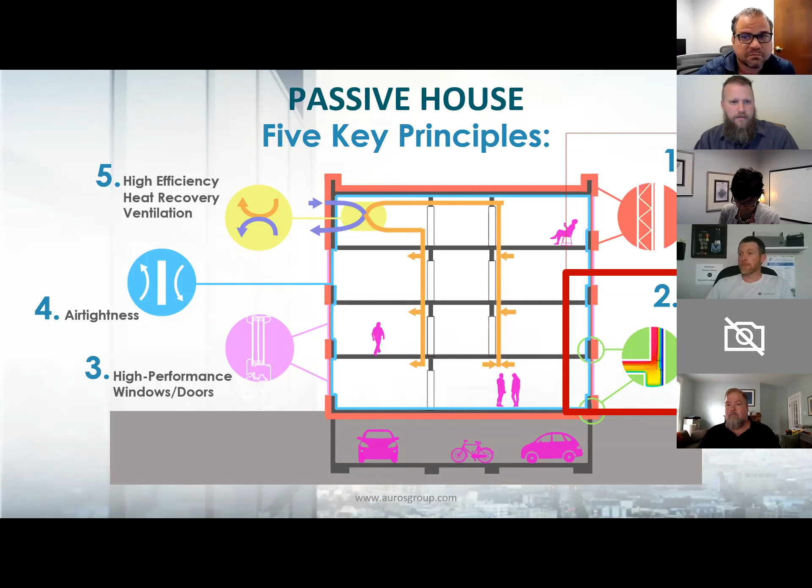Last week we talked about insulation. Now we're talking about thermal bridge-free connections and thermal bridge-free design. We will move on to the other topics in the future every 2 weeks - windows in 2 weeks, air tightness in 4 weeks, and high efficiency heat recovery ventilation in 6 weeks. Those are all the dates - if you receive the invite, you get all the same dates. If you need more info, you can reach out to us, and our email will be up again at the end. We'll email this deck out to everybody who registered, and then you'll see it on our social media, so you can track it that way or just shoot us an email.

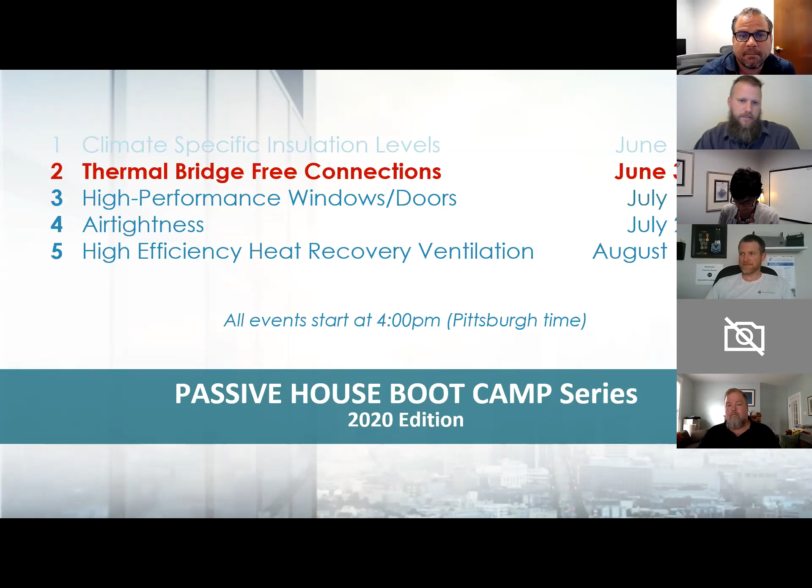There you go. Yeah, thermal bridges. So we have Matt Bowers with us today.

Matt Bowers is an expert in the passive house world, in the PHI discipline. If you saw our 101 earlier, you'll notice there's PHIUS and there's PHI. Matt is mainly a practitioner in PHI. He's from Rochester, New York, lives in a passive house, and has been practicing passive house for many years. He is a passive house certifier, which requires additional education including time in Germany with the standard writers, and he now certifies projects. Matt has expertise in thermal bridge analysis and designing thermal bridge-free buildings.

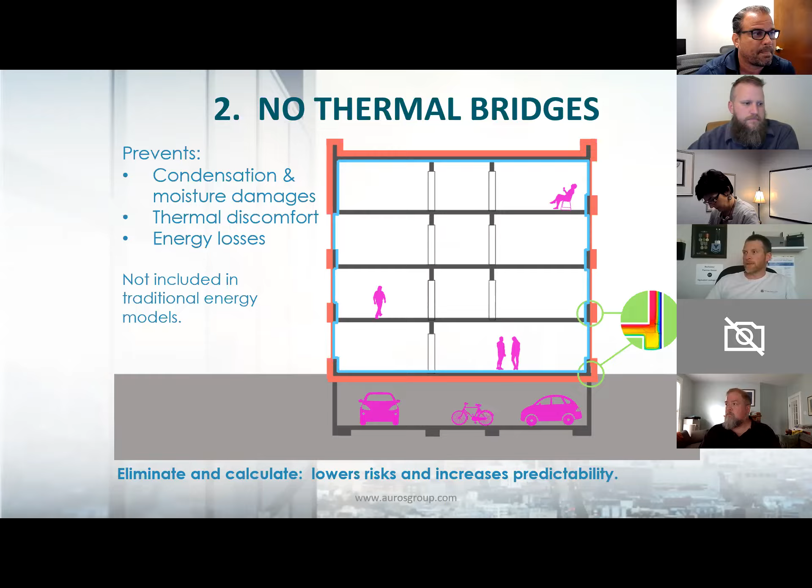Let's do this here. All right, so there is my beginning slide here.

Again, my name is Matt Bowers. I'm the president of Rochester Passive House Consulting, and I'm also a member of CertiPHIers Cooperative, a group of 5 or 6 certifiers in the US, all throughout the country, and we work together and collaborate on certification projects. The reason I got into certification was a bad experience getting my own house certified, and the unresponsiveness of dealing with overseas certifiers. That was my motivating factor to becoming a certifier. I'm also a certified passive house designer and a tradesman. I worked for an insulation company for 10 years before becoming a certifier and starting my own business. So I've had my boots on the ground for quite some time now.

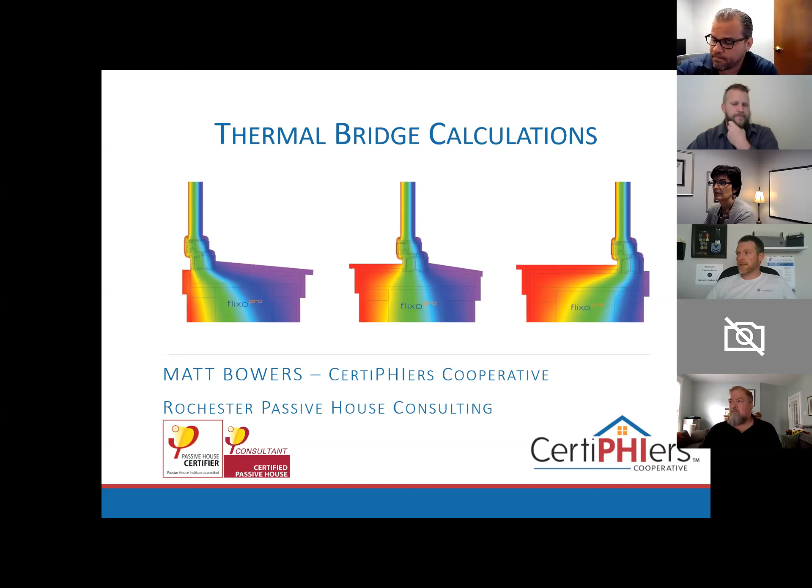So for those of you who are certified designers or consultants, you may have heard this from your trainer: just make your building thermal bridge free. It's so much easier. That's not really helpful. That's one of the 5 main elements of passive house, and they'll just say skip it if you can. Then later in the slide they'll talk about how, to be thermal bridge free, your psi value has to be less than 0.006 BTUs per hour foot Fahrenheit. That's not an intuitive number or set of units for just about anybody. So usually you leave your designer or consultant class with more questions about thermal bridges than answers.

So today I just wanted to talk in really generic terms about what a thermal bridge is, where we can find them, and how we enter them into our energy model. So first, what is a thermal bridge? Well, it's really just a discontinuity of your thermal envelope. I know that's kind of a cheesy answer, but a thermal bridge is just anywhere in your model that is either not counted or counted twice. We account for that in different ways, taking a look at the thermal effects it has on your heating and/or cooling demand.

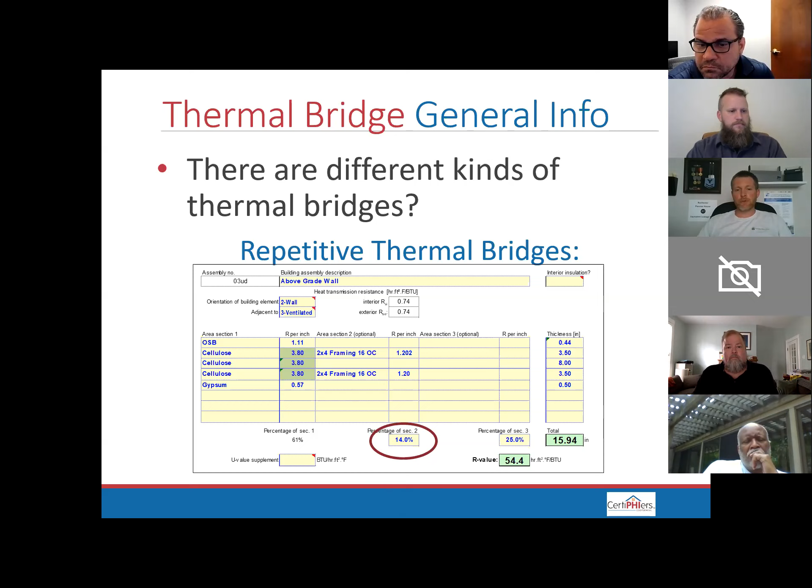So there are 3 different kinds of thermal bridges. There's your repetitive thermal bridges, which are probably your most common, and the biggest example is going to be a stud in a wall. This is a screenshot of your passive house planning package, which is a really phenomenal tool - it's your energy model, also called PHPP. This is just a screenshot of one of the assemblies in your R-values tab, or your U-values tab if you're using the SI package. We enter our repetitive thermal bridges right there, as a percentage of the studs in your wall. Those are the most common repetitive thermal bridges.

There are point thermal bridges, which are probably the thermal bridges that give people the most anxiety. There are some side calculators within PHPP, or your passive house planning package, to calculate those. The most common point thermal bridges you're going to see in a house or building are going to be cladding clips.

Once in a while you'll run into a larger issue, where you've maybe got a steel I-beam that's going to penetrate your thermal barrier, and that might require a 3D thermal bridge calculation. These are really intensive - a single thermal bridge model could run between $3,000 and $5,000, and take someone who knows what they're doing almost a week to complete. What I'd recommend is that you spend that $3,000 to $5,000 improving the design instead, so the I-beam isn't necessarily penetrating, if you can avoid it.

So moving on to what I'd really like to talk about today: your assembly junction thermal bridges, or linear thermal bridges. Those get entered in the areas tab of your passive house planning package, way down at the bottom where there are entries for thermal bridge inputs. You'll enter your calculation from either Therm, a two-dimensional thermal bridge calculation tool, or Flixo, a much higher-end, more intuitive tool. You'll enter your psi value, which is BTU per hour foot Fahrenheit, right there.

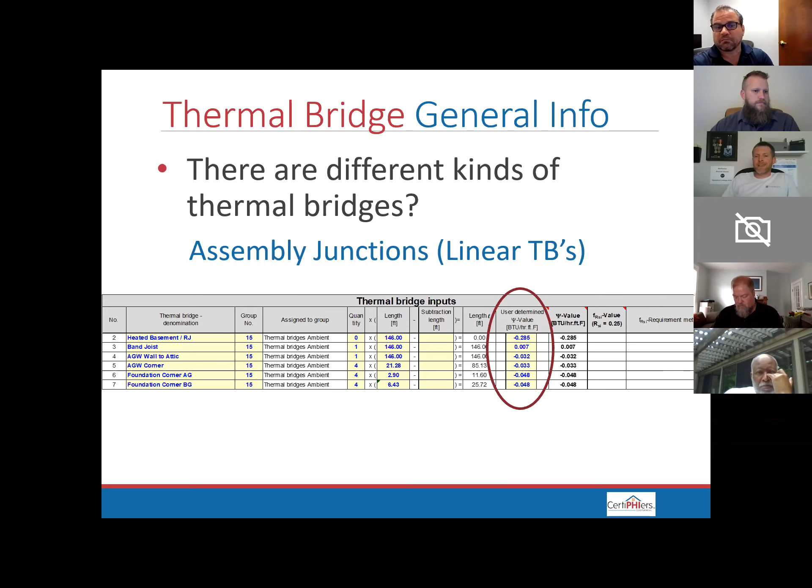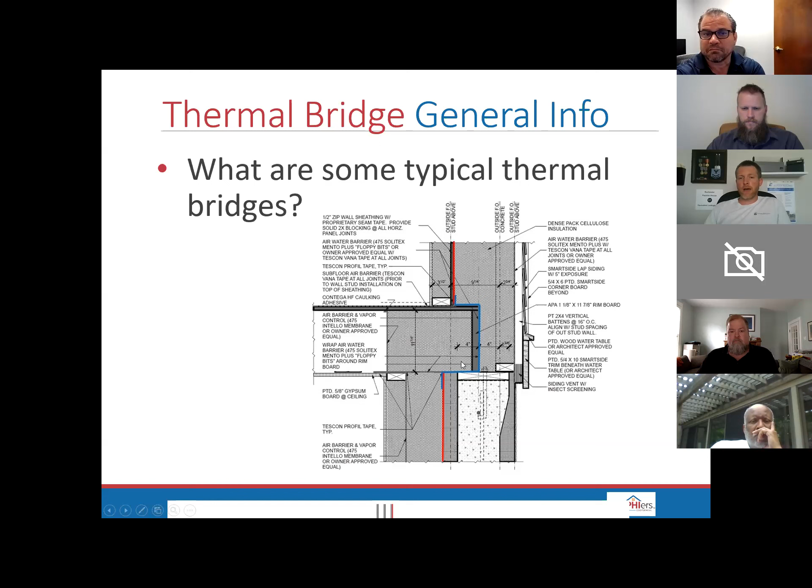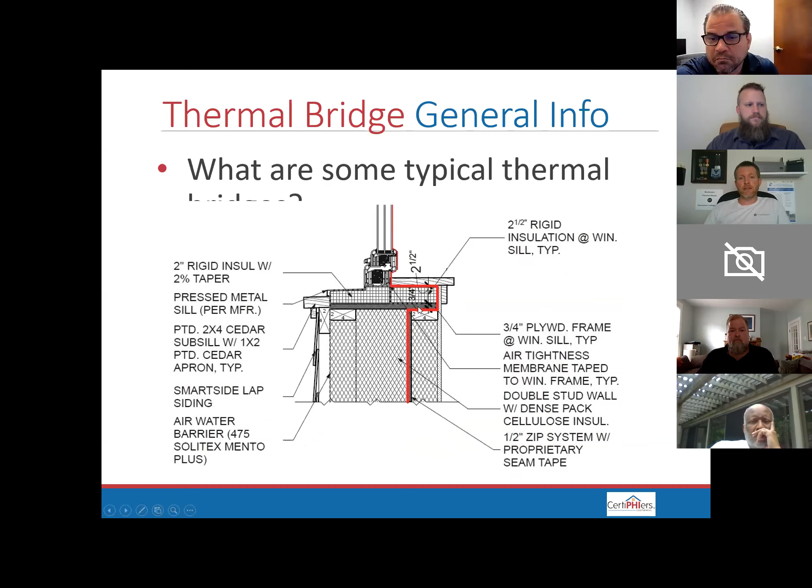If you've got a wall section, you can see here a band joist where there's extra framing between the first and second floor, and your rim joist detail where concrete and insulation somehow connect to a flooring system and then an above-grade wall. This is certainly a thermal bridge worth taking a closer look at. And then maybe my pet peeve, or soapbox, is window installation. I'm a big one for window installation details because they can have maybe the biggest impact of any linear thermal bridge in your building. I'll talk about that as we move on here.

So just general information - what is a thermal bridge and what does the calculation look like? We're going to take this detail, your two-dimensional thermal bridge model, and subtract from it what we've already included in the model, which is an above-grade wall and another above-grade wall. How they come together gives you your psi value. We subtract the true heat loss of the corner from what we've already accounted for in the energy model, which is why you're always going to measure your building with outside dimensions - it's consistent and yields better, more conservative results without having to analyze any thermal bridges.

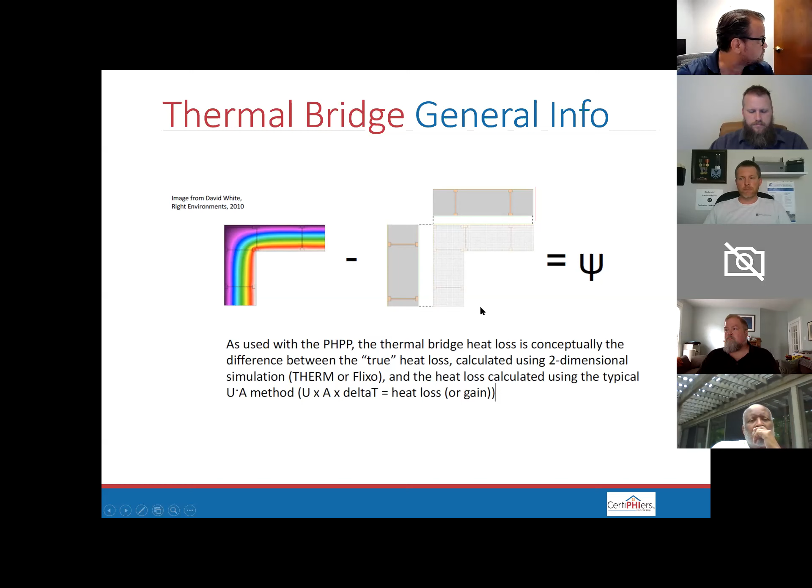This is a screenshot of a Flixo model of a thermal bridge calculation - this is kind of what the output looks like. We've got our formula here at the bottom with lots of Greek letters and letters with sub-numbers. What do all of these mean? Our psi value is going to equal our heat loss number - the actual heat loss of the model, which is 13.0 - divided by our temperature difference. Because we're in SI units, it's 20 degrees Celsius minus negative 10 degrees Celsius, giving a 30 degree Celsius/Kelvin delta T. That's one part of the formula.

Now we need to subtract what we've already accounted for in our energy model. Our U value between F and A is going to be 0.102. These numbers might not be intuitive, but the process is the same whether we're working in SI or IP units. We take the U value and multiply it by the length in the energy model, and we do the same thing for the other wall. Between C and H, our U value - which should be pretty close to what you have in your energy model, whether that's PHPP or WUFI passive - times the length.

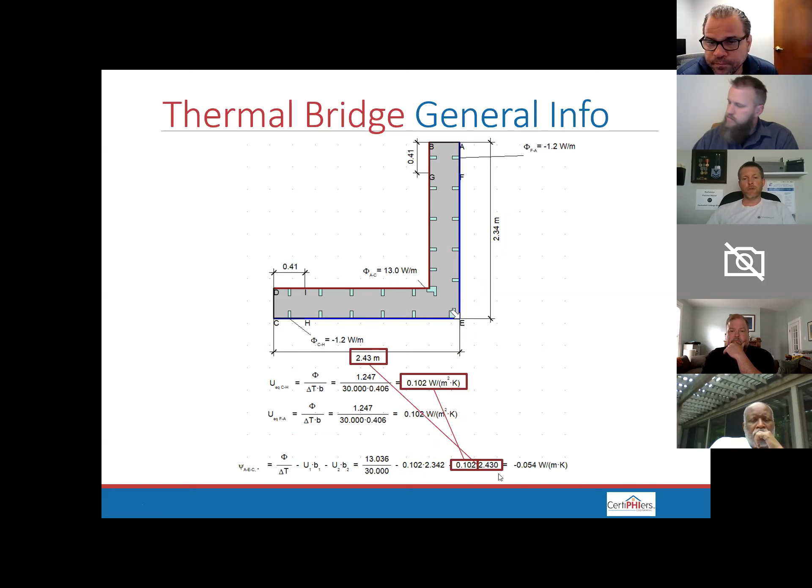And then that all comes together to be negative 0.054. If we do a quick unit conversion, that gives us negative 0.031 BTU per hour foot Fahrenheit. So this detail is considered thermal bridge free.

What we're going to do is take this number and input it into our PHPP. So we've got above grade wall corner, we've got 4 corners that are 21.28 feet tall, and the psi value we just calculated is negative 0.031. That's how you enter a thermal bridge once you've done the calculation.

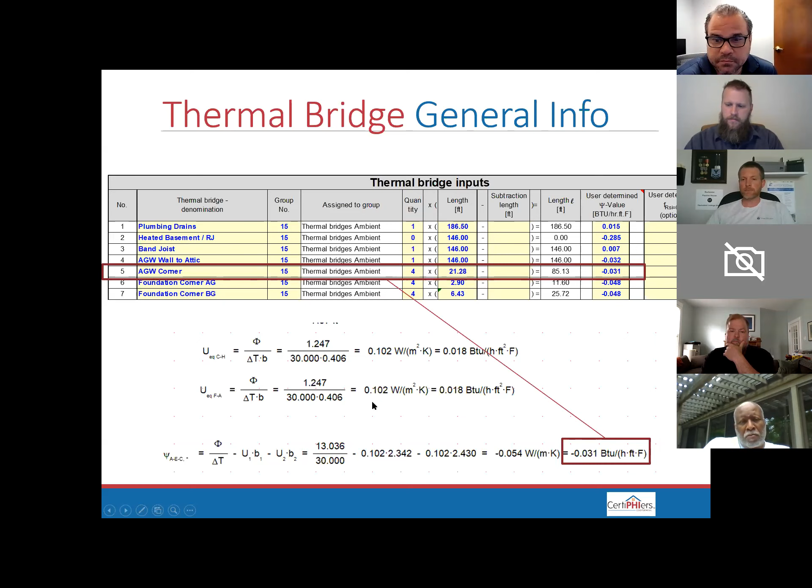Now I do have a set of thermal bridge calculations all ready to go that I wanted to go over with you. This is Flixo, and it's much more intuitive than Therm. What's really nice about it is it does the reporting for you, so you don't need a separate calculator to do it.

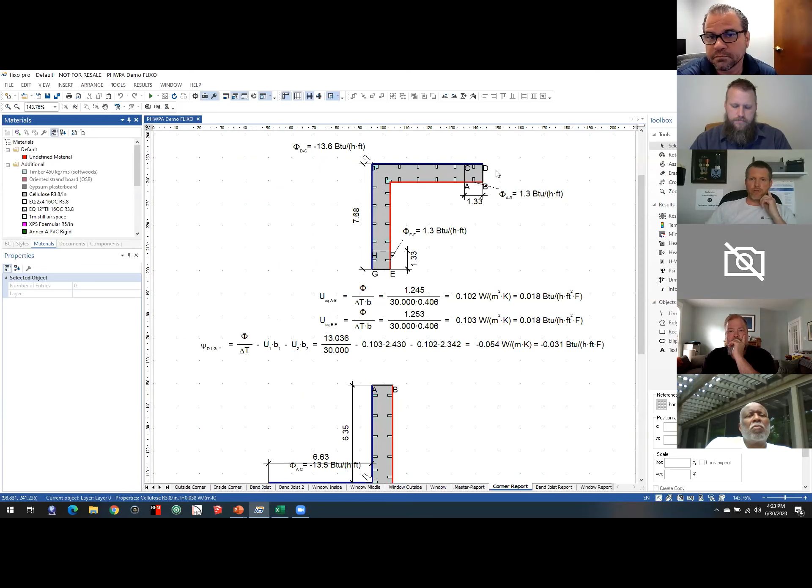But what we've got is our thermal bridge calculation. This is the one that I just showed you, right? Negative 0.031. Now if we look at it from the other perspective, the blue line, and I'm zooming all over the place here, the blue line is your exterior boundary condition.

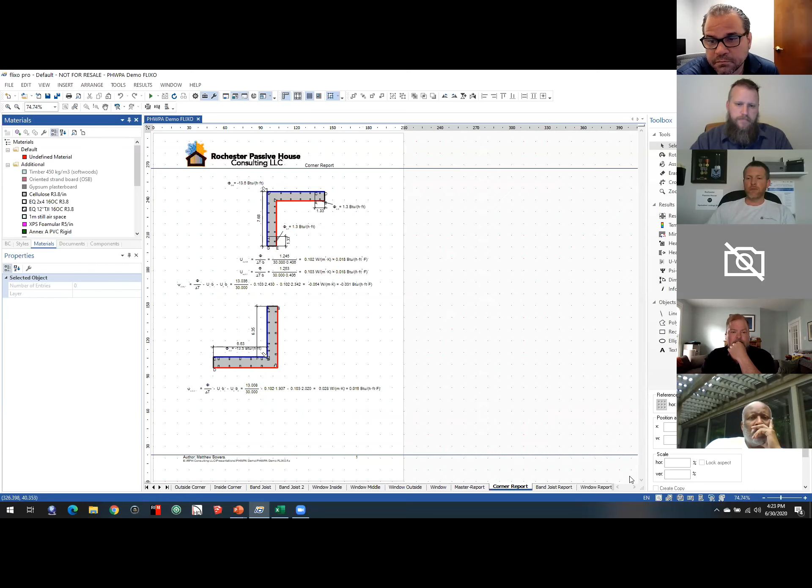So if we were to take a look at this corner as an inside corner, we've got our exterior condition here, and maybe we've got a bump out or something going on. If we look at that detail, let me zoom to page width here.

Okay, so now our lengths have gotten shorter. We might have a little bit more framing in the corner, and this is going to yield a positive thermal bridge. This number is 0.016 BTU per hour foot Fahrenheit. This is a positive thermal bridge, and this needs to be accounted for in your energy model.

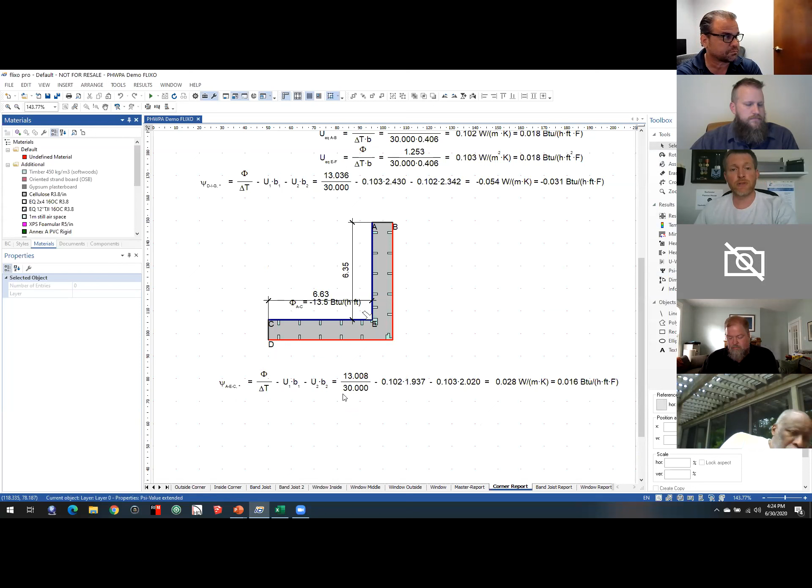This calculation is a really, really quick calculation. Let me show it to you on the next one. So this needs to be entered in the same method as the outside corner does.

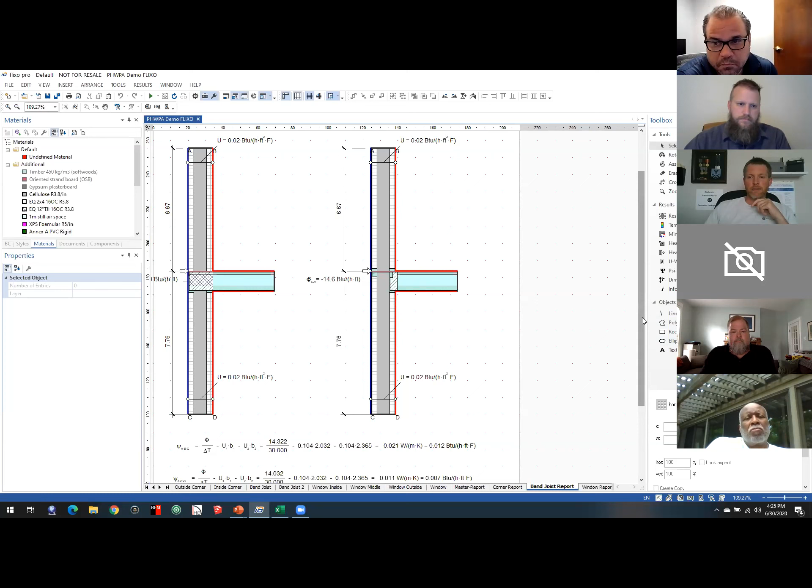We've got nearly a thermal bridge. So the first detail is over here, and we've got a thermal bridge of 0.012. This is a positive thermal bridge. On this detail, it's nearly thermal bridge free, and maybe addressing a higher R value on the band joist right here would make this a thermal bridge free calculation. So there certainly is a difference when it comes to inside wall to outside wall load bearing when it comes to double wall construction.

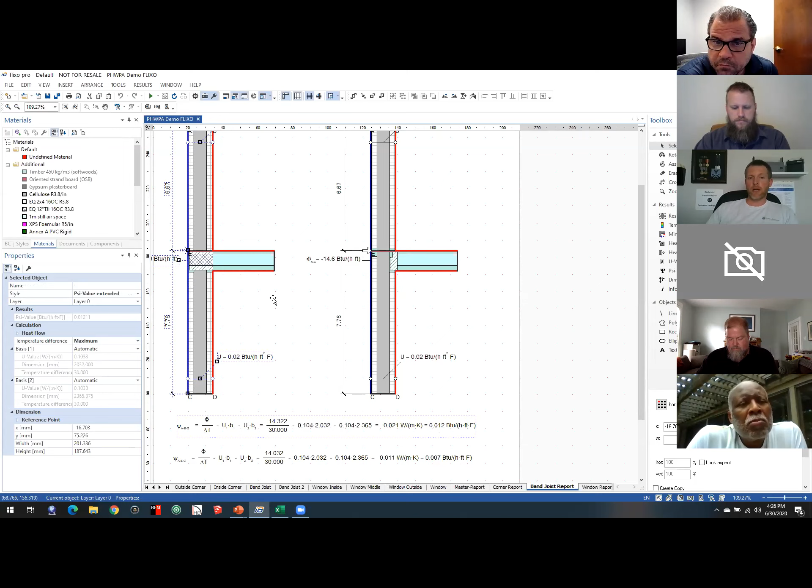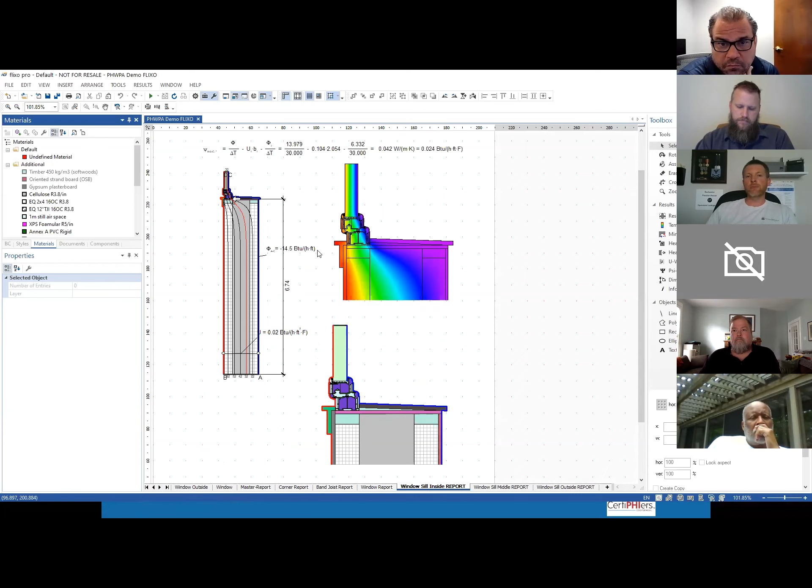And really, the meat of what I wanted to talk about is going to be the window installation. So we're going to look at three different situations: an inside, a middle, and an outside mounted window. Same exact detail, and this is a close-up of the inside mount detail. The window is mounted right on the inside. We've got a little bit of a slope coming through over here to shed water away. This is your thermal image diagram that kind of shows isotherms going.

And then this is actually our calculation over here. If we look at this, we've got a thermal bridge number of 0.024, which is pretty close to what the manual says is a default value. So that's not a great number, but it's not a terrible number either.

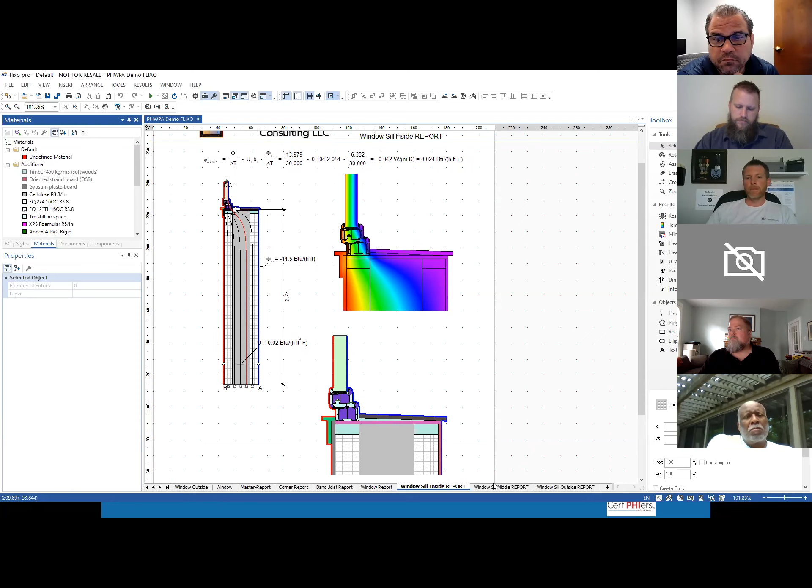But what happens if we just move it to the middle?

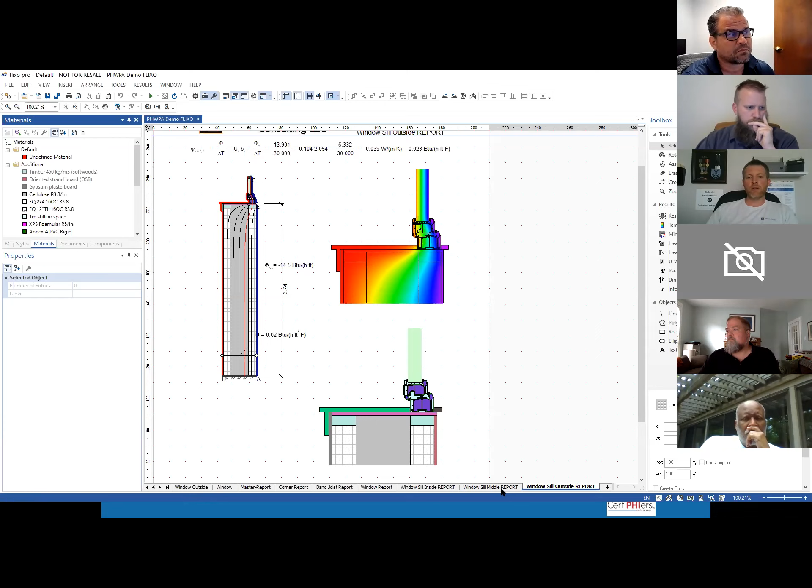And how much could this possibly matter, right? So there's about 350 linear feet for a single family house of window installation thermal bridge. Okay, so if we input those...

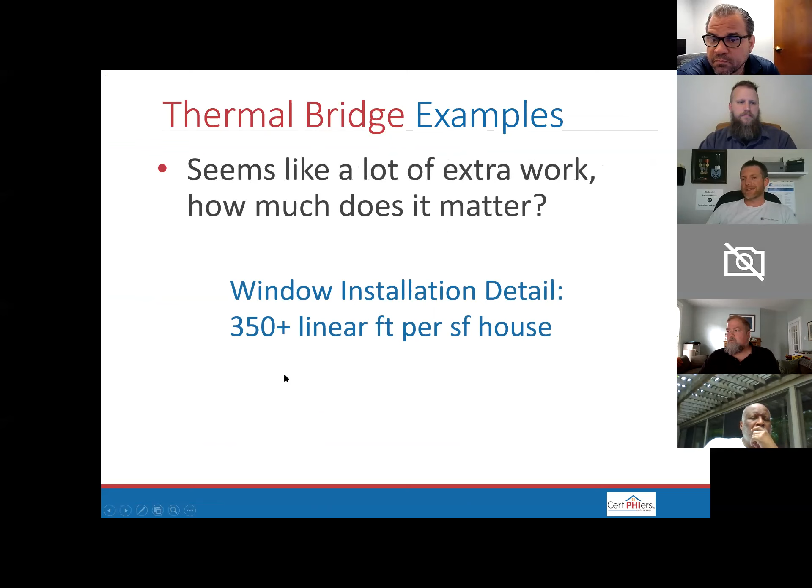Into our PHPP, okay, we're starting with a heating demand number of 4.46, and our magic number for passive house is 4.75, right? So we want this to be under 4.75 when it's all said and done. So we enter our 0.023 value, and we're still meeting passive house level heating demand, right?

But if we change that to 0.01, which is putting the window in the middle of the wall, over 350 linear feet is going to significantly reduce our heating demand, right? So 4.18 now from 4.46. That's a significant difference, and all you're doing is moving the window to the middle.

That's a 6% difference, and you're probably looking at adding another 2 inches of insulation to the outside of the house to make up for that.

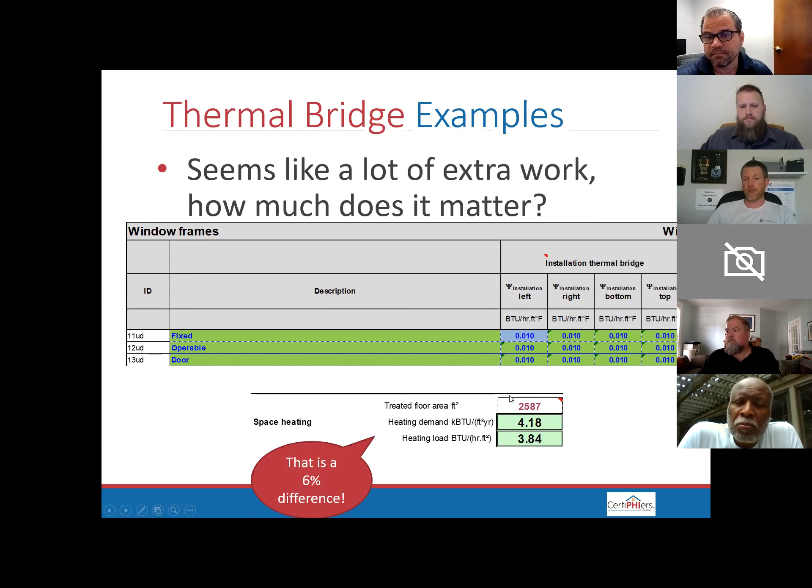Okay, that was a real quick overview for everybody, and I would be happy to answer any questions. Let me just open this back up here.

Hey, Matt, why don't you keep the screen? Yeah, we might be dipping back into Flixo here and answering some technical questions. We got some technical people in the presentation.

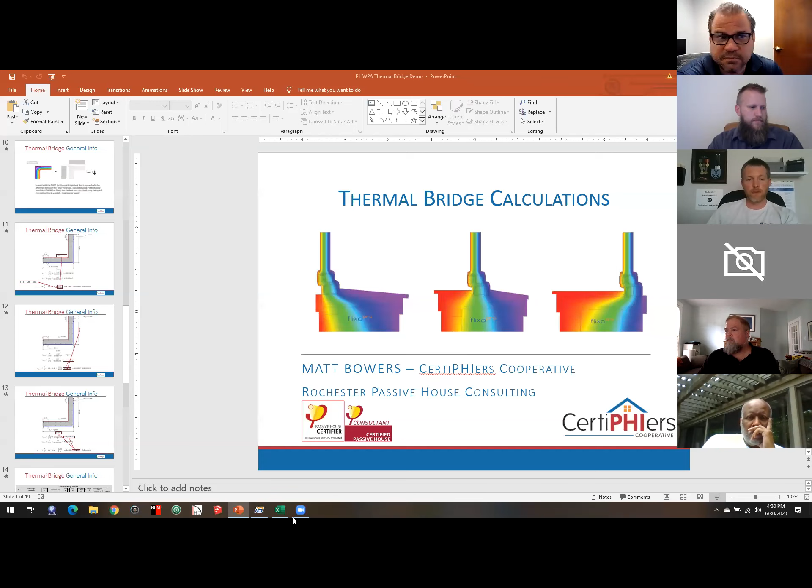Let me pull it up here. So, let's see. So yeah, if you have any questions, feel free to unmute yourself, and if I don't know the answer, I'll make something up, but I'll find the real answer for you, I promise. So I guess I'll get it kick started. Please come in with any questions.

How about the location of the windows? Are the location of the windows climate zone specific? Are you finding that there's a correlation to climate zone, or are you just pretty much generally locating this in the center of that wall first?

So in general, I always want to put the window in the middle of the R value of the wall. And the reason I say it like that is wall assemblies can vary, right? You can have polyiso on the outside of a 2x6 wall, and a majority of the center of the R value isn't necessarily going to be the center of the wall. With a double wall, it works out that it's smack dab in the middle, but it's important, and that's going to affect your install psi value just based on being in the middle of the R value of the wall.

With respect to climate zone, the impact, the psi value is going to be the same regardless of climate zone, but the impact it's going to have on the energy model is going to be more climate zone specific, if that answers your question. It does.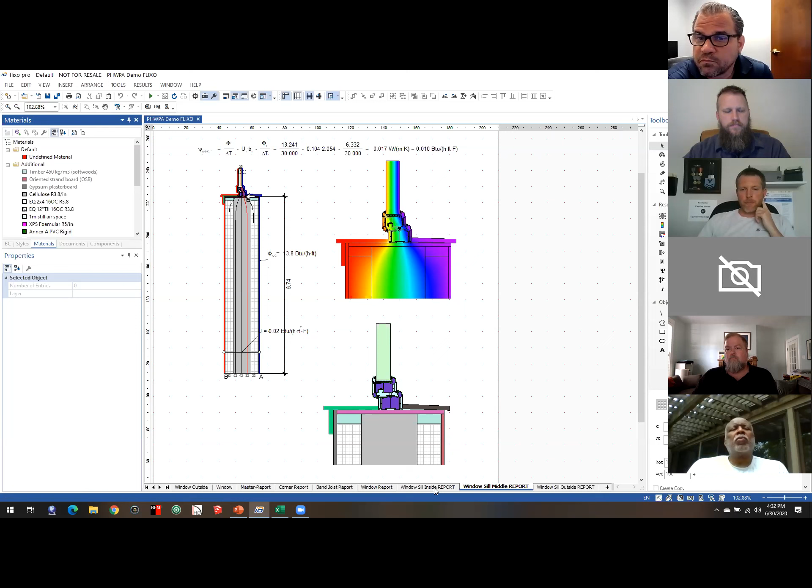When you connect the two walls, and let's see if I can zoom in a little bit better here, when you connect the two walls at the band joist with the second floor subfloor, you can transfer the shear strength from your shear wall to your load-bearing wall. So it was a fairly complicated wall assembly, but we needed sheathing on the outside because the homeowner really wanted vinyl siding, and you need a backer for vinyl siding. So that's what we came up with.

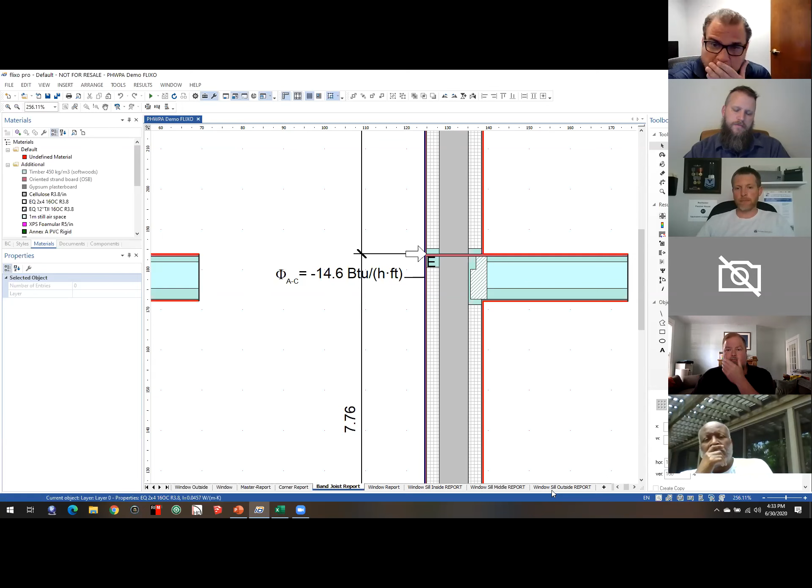I'm taking a breath, giving our audience plenty of time to come in with all these great questions. Greg, I have a question. Gerard's got one. All right, Gerard.

Are there any situations where you have different orientations where you would put the window location within the wall at different depths, like if you're trying to take advantage of free heating or something like that?

Yeah, and that's a really good use of design PH. You can build the building in SketchUp and then change the recess of the windows to take advantage of the shading elements of your buck, and then you can weigh that against what the thermal bridge value is going to be. So there is a way to do that.

Most commonly what I see is doors are going to be installed all the way to the inside so that you can open the door 180 degrees. And then there usually aren't too many doors in a house or a building, so you can take that minor hit of having a thermal bridge for the convenience of being able to open the door all the way.

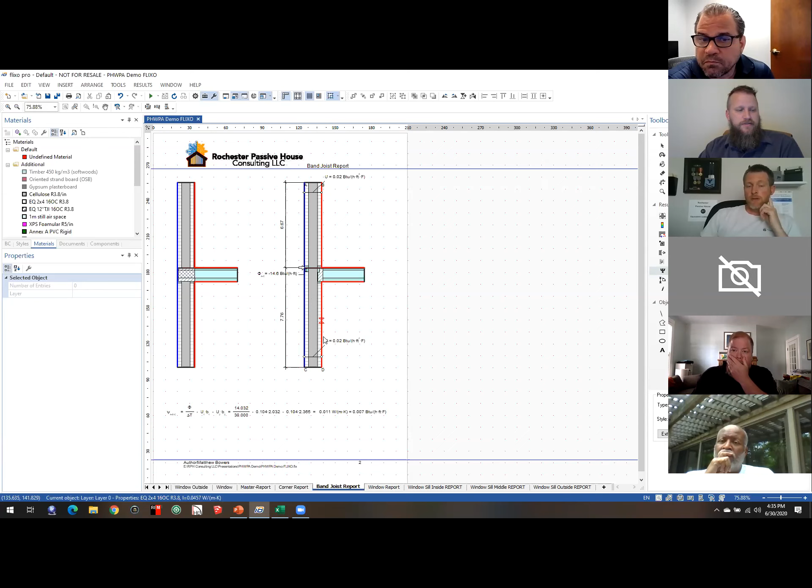Sonia was asking to walk you through a thermal bridge modeling process in Flixo. All right, so let me do a band joist, because I want to make sure we get all the questions, because that could take a while. It's kind of complex. We had Flixo training in Pittsburgh a couple of years ago, and it was a 2 or 3 day course, so this will take 10 seconds.

So we've got our model already created. Each one of these polygons has been given a conductivity. Where it's hatched is where we have repeating thermal bridges. This is a 2x4, 16-inch on center with cellulose in the cavity. The hatched polygons are accounting for repeating thermal bridges.

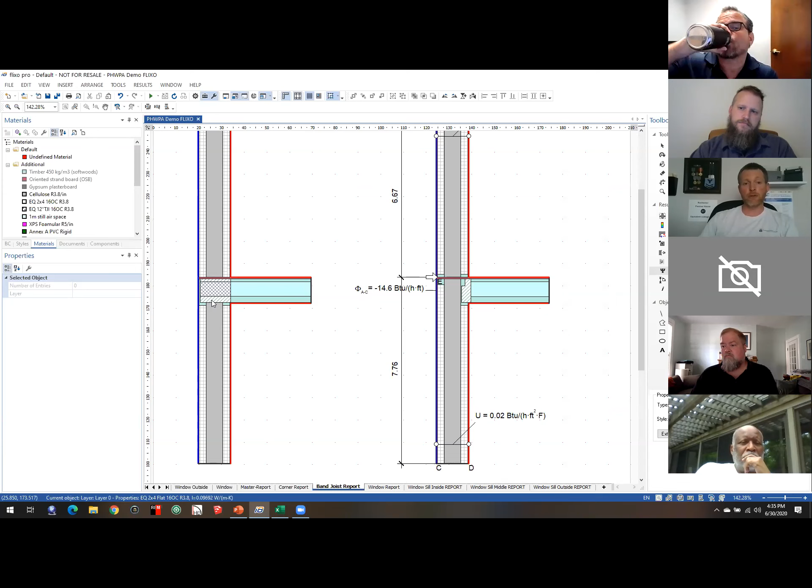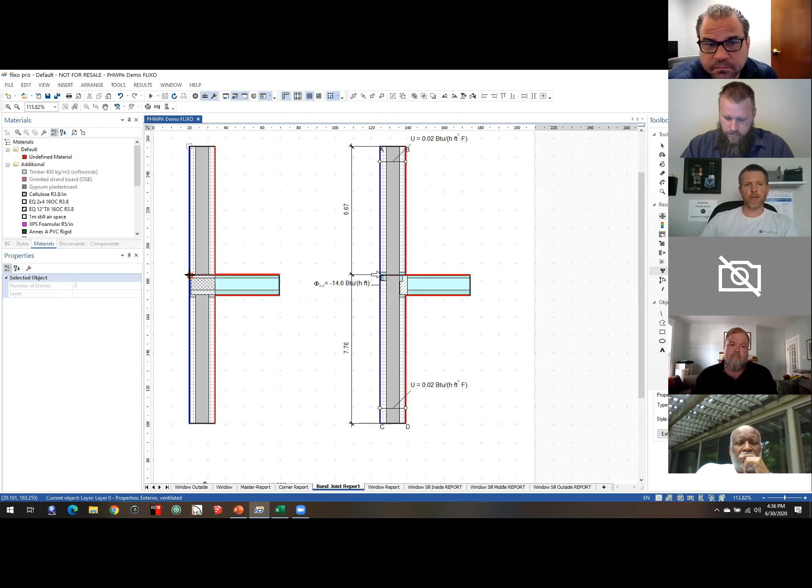Now all we need to do is select psi value. We want to do a psi value calculation. We're going to select the beginning point and the end point of the model, so we'll start at the top, then scroll down to the bottom, click there, and then it needs a reference point. It wants to know what we're comparing to what, so somewhere in the middle here is going to be our reference point. I'll click there, and then Flixo does this calculation for us.

It senses where the U value is for the top and the bottom wall, right? It gives me my total unit heat loss, which is a phi value - this is the Greek letter phi. And then it does my dimensioning for me, and spits out this cool little equation, and there's our psi value.

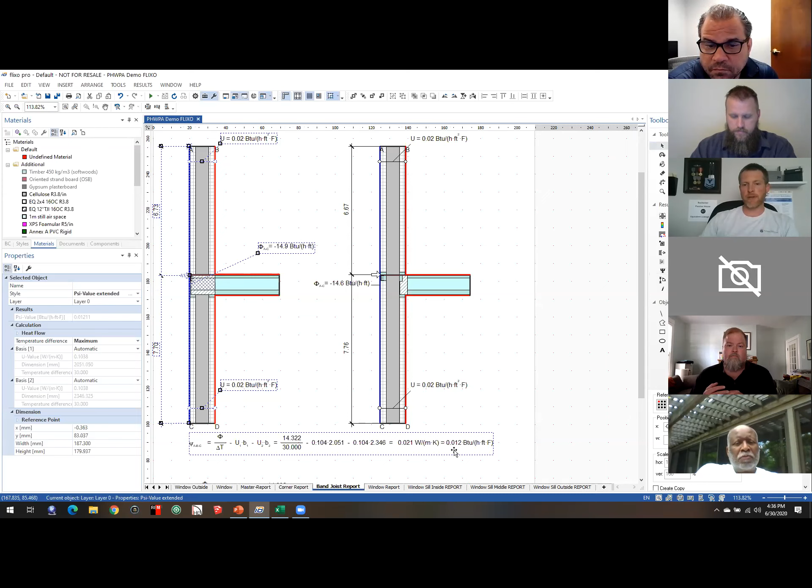Hey Matt, you said you really like Flixo because it provides a report that's easily submitted to PHI for certification around these bridgings. Can you talk about that?

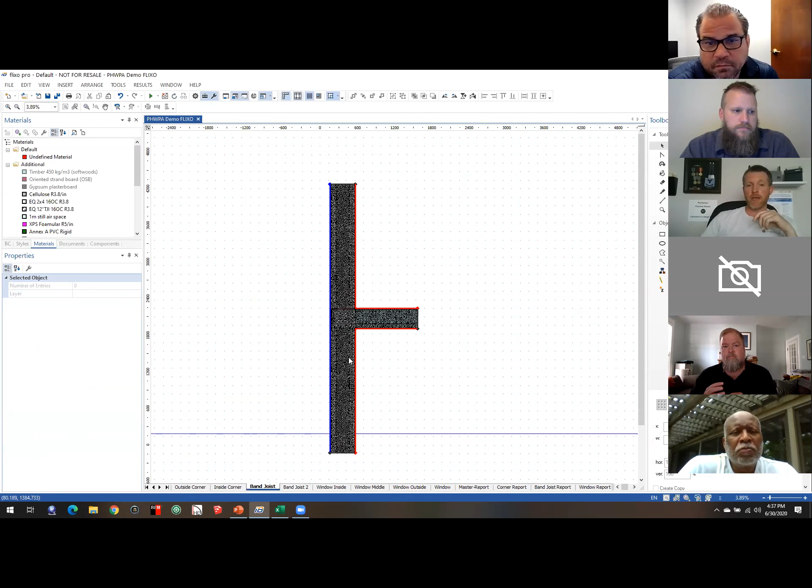Yeah, so the first thing we do is we can import models into our drawing page. This is kind of our paper space where we create the model and give everything an R value - this is a 2x4 16-inch on center with R3.8 in the cavity. So we build all of this, we give it boundary conditions, which are already in the program. The boundary conditions are minus 10 degrees outside, and then 20 degrees Celsius inside, and we can change the units fairly easily.

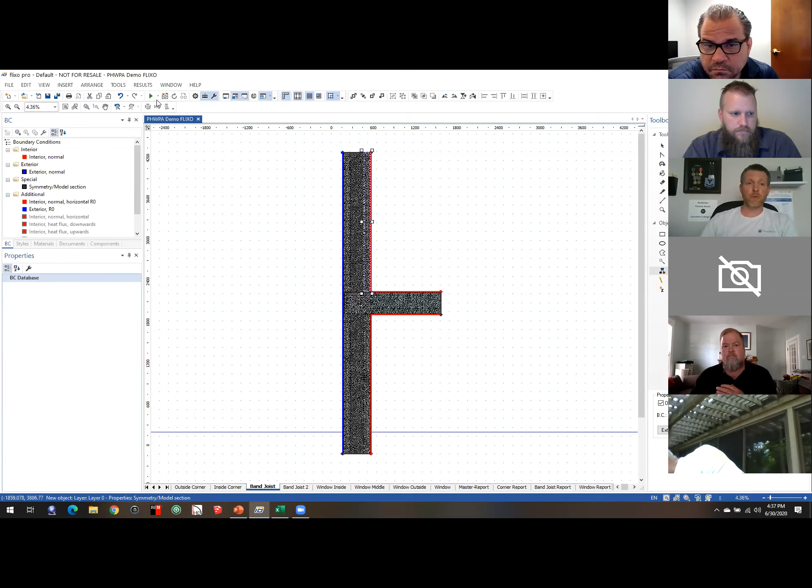We build it here, and then we hit this play button, and it'll go through all of these different iterations. So if I just did this and we hit play, it's going to run, and this is very similar to what Therm does, but Therm kind of stops here - it'll spit out maybe a U value or your heat loss value, but it won't put it into an equation for you.

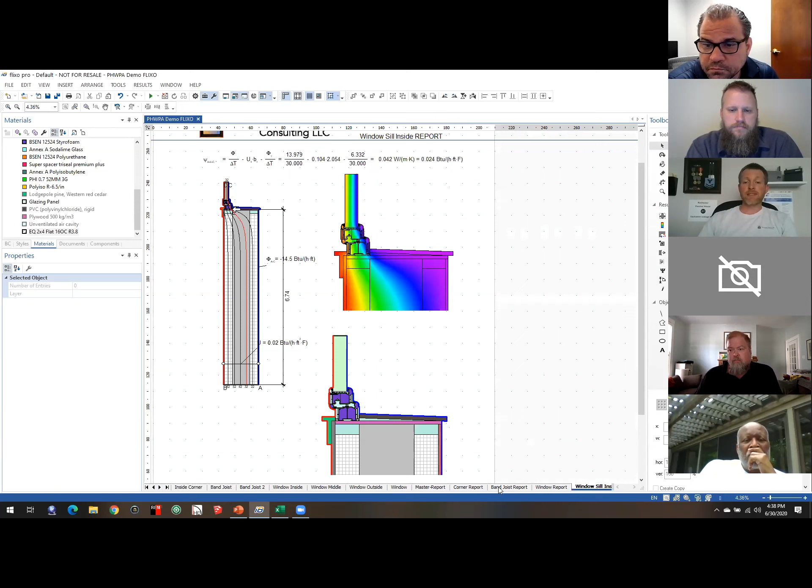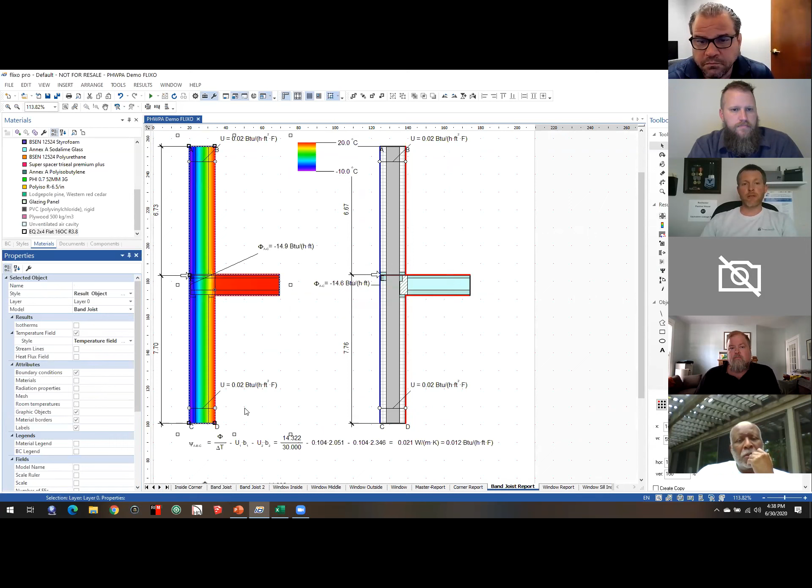So you need to have a secondary calculator handy. That's where Flixo has the reporting feature where it'll just take this model, and we can add isotherms, which are the lines of where the temperature gradient within the wall is. We can make it a temperature field, which is the pretty little rainbow color. We can add a heat flux field, which is another feature where it's focusing the heat loss points.

So there's all kinds of different reporting view types and things like that we're able to do with Flixo. We can add other objects to the same report so we can compare models right next to each other, and once you have your reports all set up, it's really, really quick.

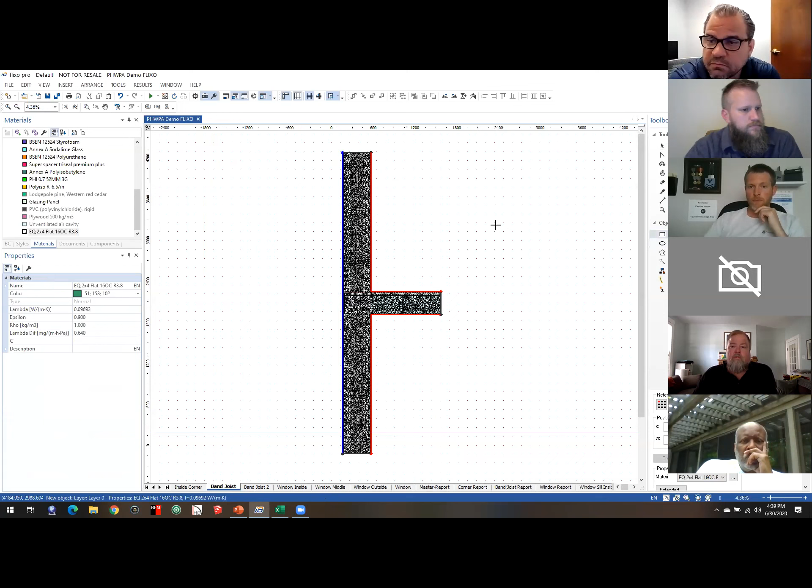Hey Matt, we talked a little bit about thermal and energy impacts, but what about condensation, identifying condensation risk? Can you talk a little bit about how that works in Flixo? Sure, so what we've got is there is another calculation called FRSI.

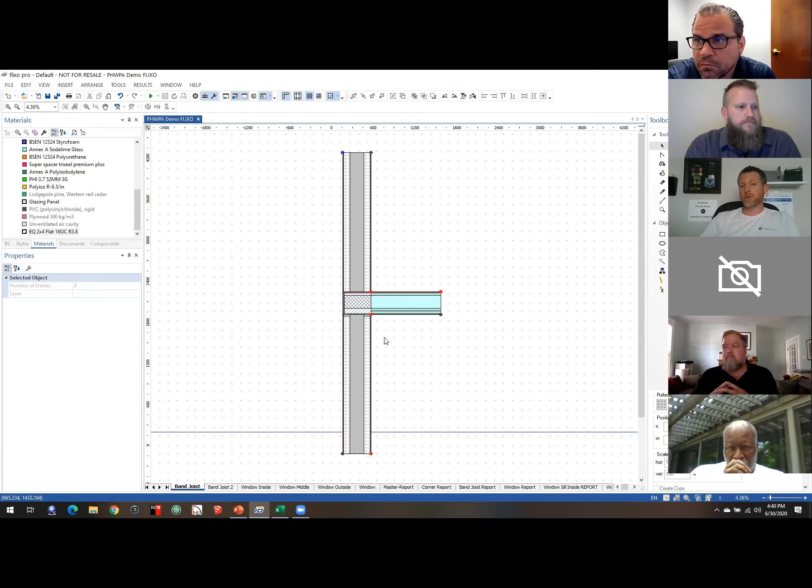That's more of a climate specific number, but it kind of tells you what your minimum allowable temperature is based on your climate zone to ensure you're going to be condensation free. So if we took a look at the outside window model, the only thing different between an FRSI calculation and a normal thermal bridge calculation to get your psi value is your interior boundary condition.

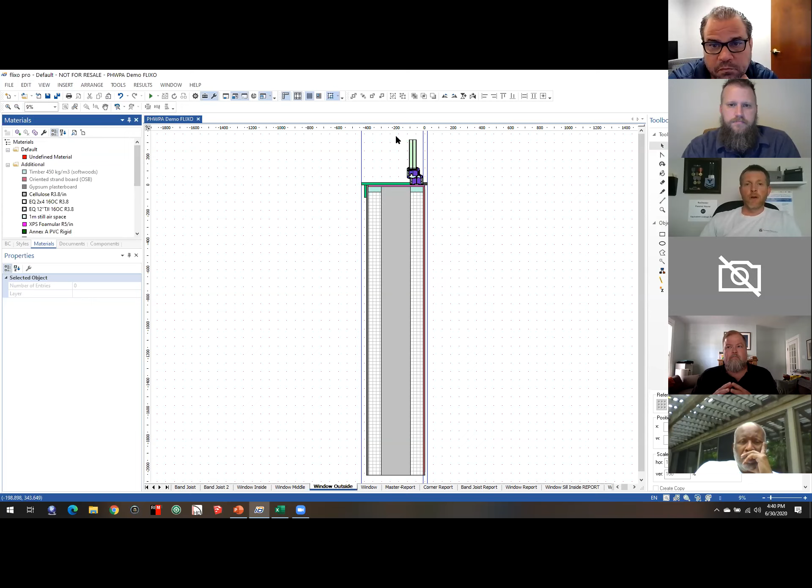So what I'm going to do is edit, select - I'm selecting all of my boundary conditions and I'm going to delete them. Now we're going to add some more boundary conditions. We're going to start with our line of symmetry where our model cuts off and continues. So we're going to click here, and the boundary conditions are distributed throughout the model in a counterclockwise fashion. Now we're going to come around - right now there are no boundary conditions in the model.

Our next boundary condition point is going to be up here where it's an interior boundary condition. But given that we're going to do an FRSI calculation, we need - I don't know if I have... all right, so you caught me here, I'm going to have to create a new one. I didn't mean to put you on the spot. No, that's all right.

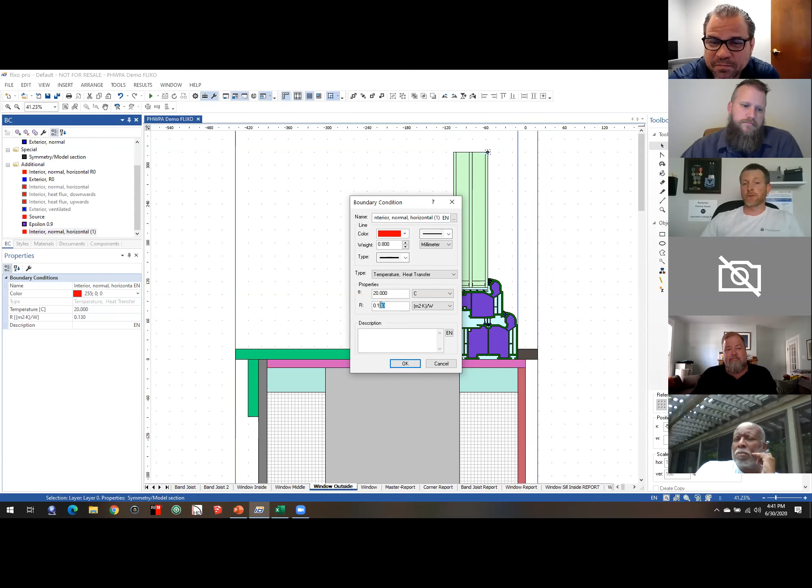So the normal FRSI boundary condition surface film value is 0.25. So I just have to create that. And now what we're going to do is take this new boundary condition and we're going to add it on the inside.

This boundary condition is going to go all the way around until we get to the bottom of the model, and this is again where the model cuts off, so we're going to draw our line of symmetry. And then our exterior boundary condition is going to be - we have ventilated cladding, right?

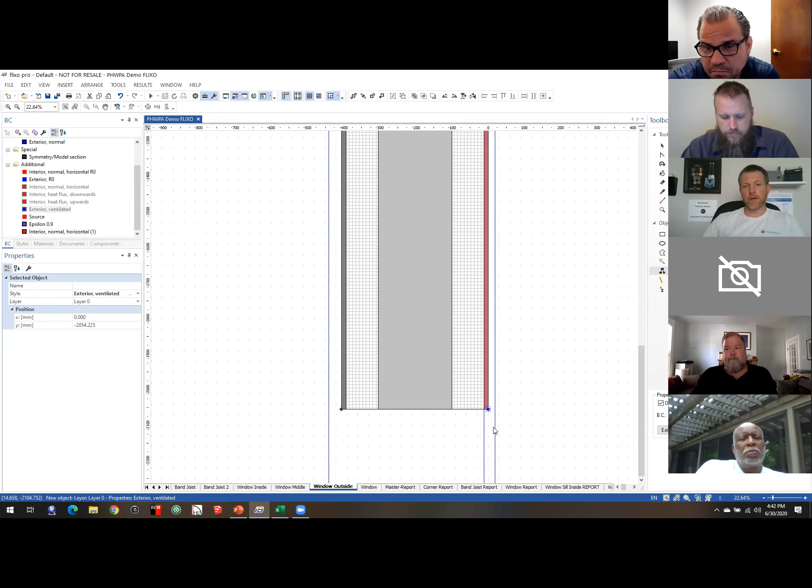It's vinyl siding, so we're going to use exterior ventilated boundary condition there, and that's going to take us all the way up to our other point. We actually transition right here to exterior normal, so where it's not ventilated cladding. All right, so that takes us to there, and now we just hit play.

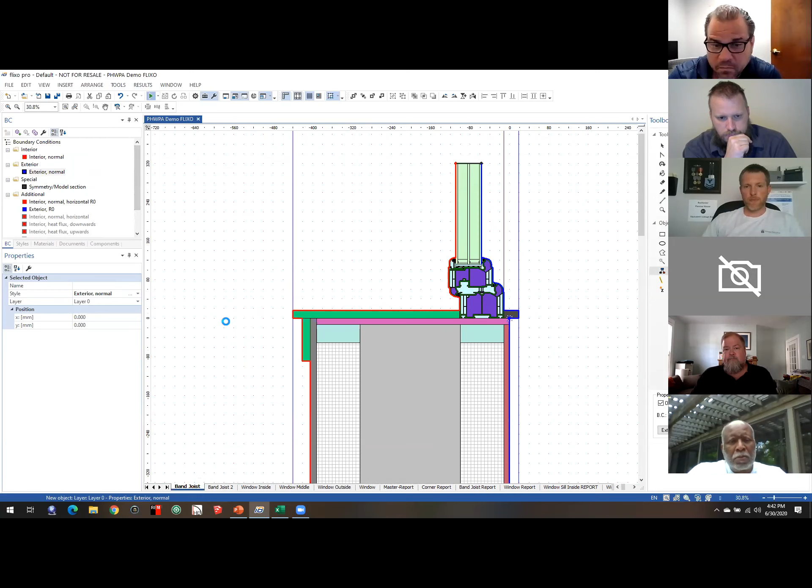And then it's going to pop us over to our window report when it's done doing its calculation. Okay, so here we are.

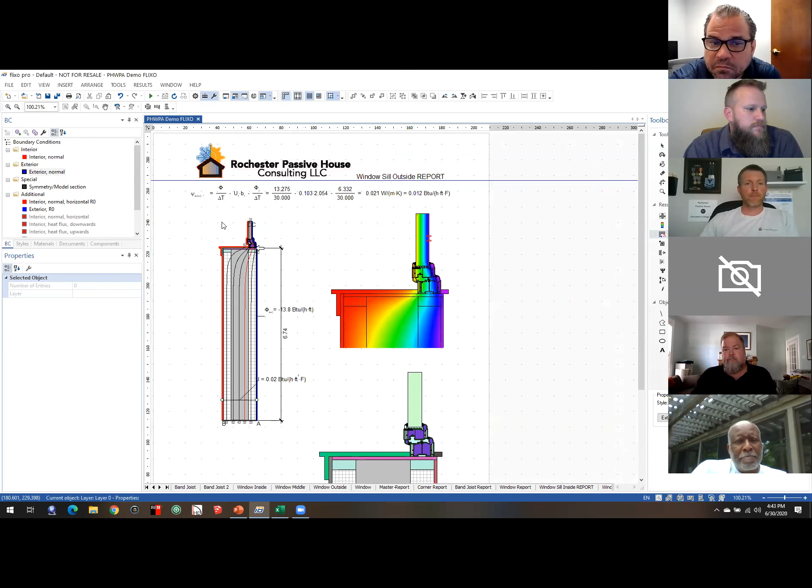Now what we're going to do is a min-max temperature, and we're going to take this and just go select somewhere on the glazing panel here, and maybe down to the wall.

So now we have our FRSI value, right, 0.762. And this detail would have condensation potential in an Arctic setting. I think Arctic FRSI calculations have to be 0.8 or above, but everywhere else in the world, this is going to be a condensation-free design.

And this value is available on Passipedia and a variety of other - this value's limits are available, and they're all climate zone specific on Passipedia. Does that answer your question? Yeah, that's a good demo.

So Matt, when you're looking at a detail and you know you're concerned about it from an energy standpoint, what drives you to decide you need to check the hygiene requirement or the condensation for a certain detail? Or usually I'll do it for a window, and if I have to do the detail anyway, yep.

It's really not very cumbersome to add this extra model. I just did it in about, I don't know, a minute. Yeah, so it's really not that big of a deal to have to do this extra calculation.

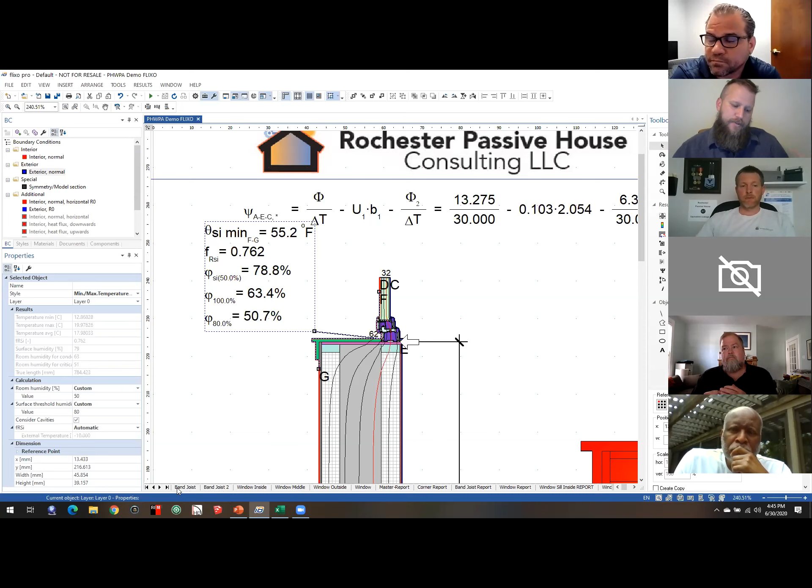And it's totally possible that you could model a detail for thermal bridge and get its psi value, or whatever it is you're looking for based on geometry, and account for it in the energy model, but that condensation potential may dictate that you have to change the detail, even though your project is meeting the energy goals. Is that correct? Yeah, so if we were to look at this model, right, an outside corner, I think everyone would agree that, yeah, this is probably a thermal bridge free design, right?

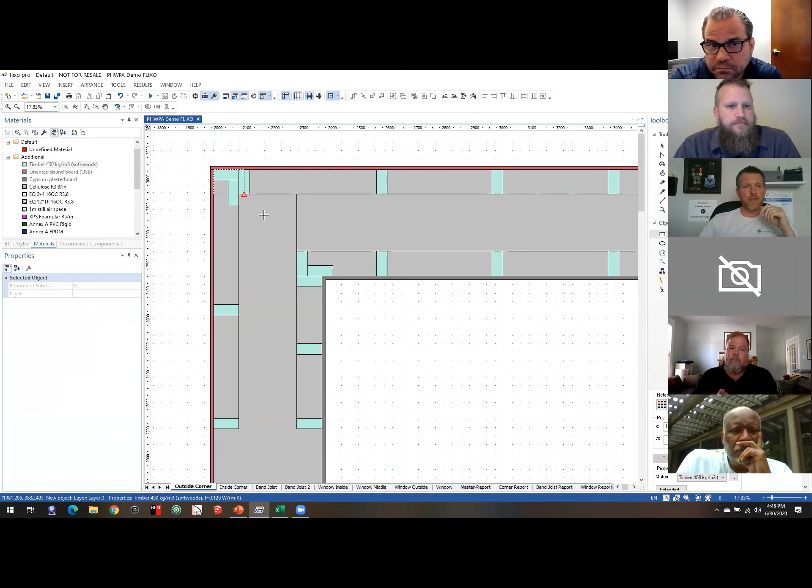And the psi value is negative. But what would happen if we just did this, right? And we're going to put a big solid wooden post right smack in this corner. I think everyone would agree that that's probably not thermal bridge free, right? But if we ran this calculation...

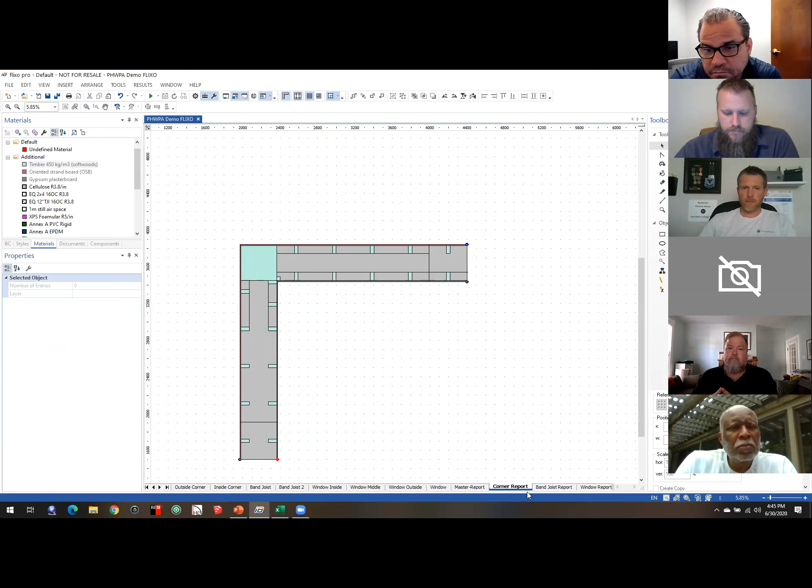Okay, and took a look at the report here, so we've got our U value being accounted for here and here, right? And this is our psi value calculation, and it's still negative, right? So just because you have a negative psi value or a really low psi value doesn't necessarily mean that it's a good thermal bridge detail.

Good, hey, question, Jim, we got a couple questions in the chat. Ian, did you want to come offline to ask your question? Or come off mute, I mean, sorry. I can ask it. Ian wants to know, are there a lot of calculations that need to be done outside the modeling software that require a building science expert knowledge, or does the software take care of most of this on its own?

Once you learn how to do it, it's very intuitive, and it can be very, very quick. Don't let programs like Therm scare you. And once you know how to do it, and have gone through the process once, you'll know what to look for in future details on how to make your designs thermal bridge free.

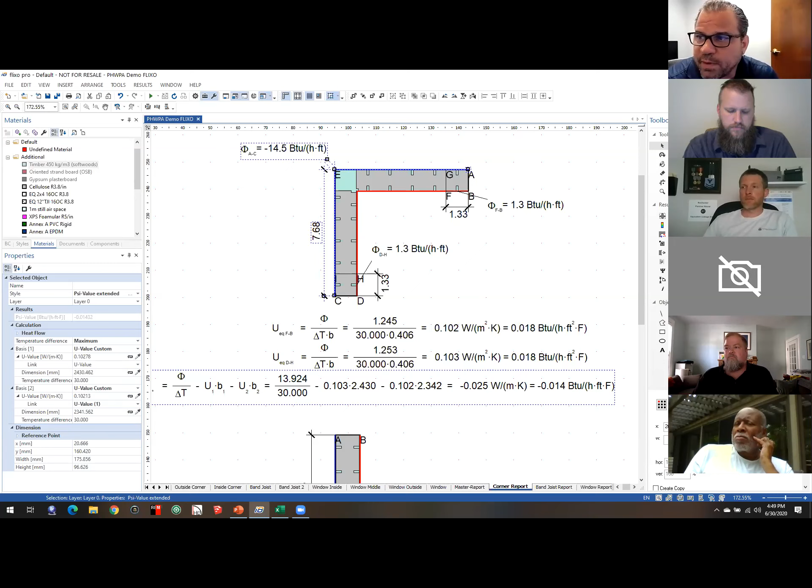And also, this is why Passive House Western Pennsylvania exists, to become a peer review maybe before. So coming in with those really simple questions and, hey, I did this, can you check it, and have a network that we can rely upon. But then once you get into the guts of a project, you do also have that additional belts and suspenders of the certifiers that will do those peer reviews. They won't do the details, but they'll do the peer reviews and give you guidance and coaching.

Right, excellent, thanks Matt. Paul Heron has a question, and he does not have availability to a mic, so I'll read his for you. On the window placement in the wall assembly, if you have an assembly with 2-inch continuous polyiso, then dense pack in the 2x6 cavity, the placement of the window in the assembly would be in the center of the R value, correct? Which in this situation might be slightly more to the exterior due to the continuous polyiso, with a slightly higher R value in the dense pack, correct?

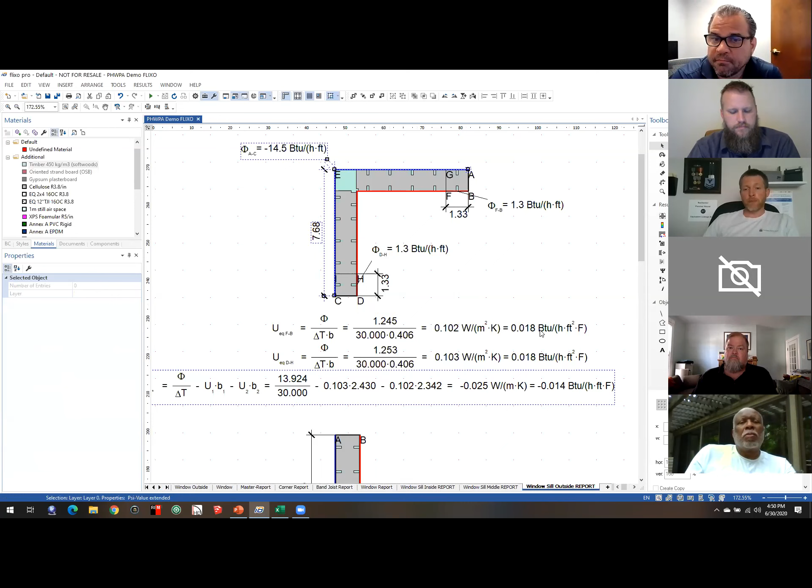Yes, absolutely. And the other thing to consider when you have exterior insulation like that is another thing that can impact your window install psi value, and I'm going to open up the outside report here. If we have continuous insulation on the outside of this, we also have the ability to bury some of the frame in insulation, and that can further help lower your psi value.

Okay, so when you have, if this is a 2x6 wall and we've got polyiso on the outside, we can run that polyiso up and bury some of the frame of the window. A lot of these passive house windows have really, really thick frames, and they're designed to be buried with exterior insulation for that purpose. Sometimes you can order, if you have like an aluminum clad window, you can order the aluminum cladding to be held short so the insulation can go back up to the window.

The other point too about deciding exactly where to put the window—hey, Nick's got one, he's holding it up—this can be buried with insulation to further improve your psi value.

Yeah, I think a lot of people refer to that as over insulating, which I think is a funny term. Because it's almost like, how do you over insulate?

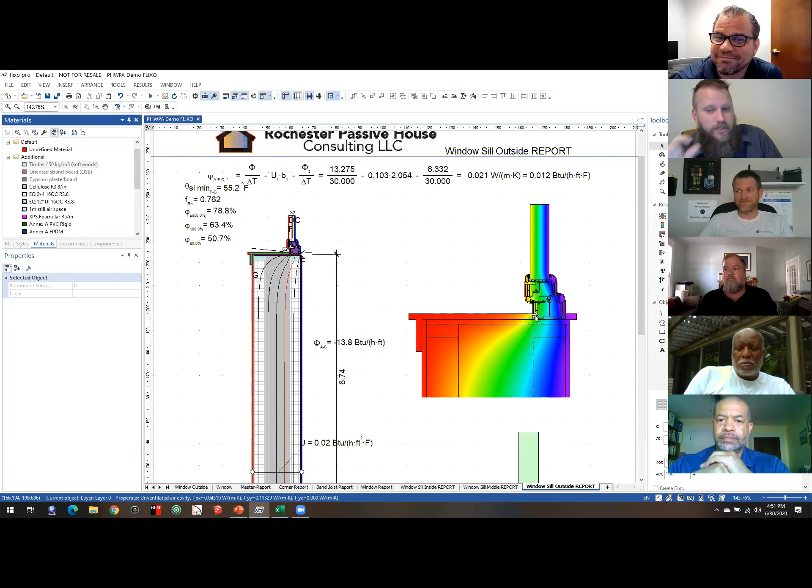The other thing I would say with window placement is you could get this down to a specific spot you absolutely love, but you still have to build it. It has to be constructible, durable, and it has to work with water and air too. So you go through iterations, you find a good one, and someone says, 'Well, how am I supposed to build that?' Now you've got this weird condition, and I'm not familiar with doing a window that way. So every project, with the same wall, similar building, different people building it, might get a different detail.

Yep, absolutely, that's a very good point. Buildability of all these details is critical. Jim, what we're seeing in practice is a lot of people are figuring that standardization out, and then they're able to duplicate that and use it on projects moving forward. You get a little more confident in every project—I've seen it done. Now I can tell the contractor a bit about the intended detail, and it gets better every time.

I'm taking a breath. Any more questions? I have a few more I'd like to ask, but come on in, ask your question please.

So Matt, how does shading come into play when you're talking about window placement? I mean, you're doing it from a thermal bridge perspective, but shading has value as well. How do you balance the value of shading from heat gain or controlling hot spots versus getting your thermal bridges perfect?

So you're not going to be able to do much when it comes to shading on the north, east, and west side of a building. You can have a 35-foot overhang, but if there's no horizon shading on the west, you're still going to get solar gain for some time during the day. So window placement on those three sides tends to be a better value if you can optimize the window installation detail. If we're talking on the south side, I think it varies on how thick the wall is.

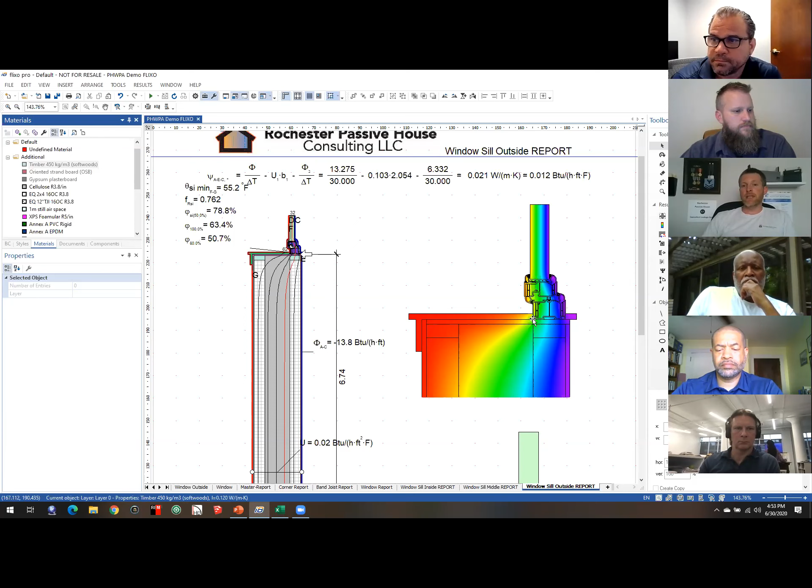And there are other things to consider on top of the shading, right? If you have a 2-foot thick wall and you put the window all the way to the inside, as you're looking out, if the window's not big enough, you could get this tunnel vision kind of look. If you put the window all the way to the outside, depending on where your air barrier is, that detail can be very, very tricky. So the shading element is something to certainly keep an eye on, and it's going to vary based on how thick the wall is to begin with.

But typically, it's going to be easiest in the middle anyway—maybe a hair to the outside to get your moisture resistance and watertight assembly completed there. But usually you're somewhere between the smack dab middle of the wall and closer to the outside.

Thank you, so we have time for a few more questions. Rebecca, I told you I'd call you out towards the end—I waited all the way to the end for you. Ooh, pressure, there she is. And on camera—I'm trying to finish something for a deadline, so I'm listening. Any questions for Matt? No, this is great, it's been a while since I've been in Flixo myself, so good to see it.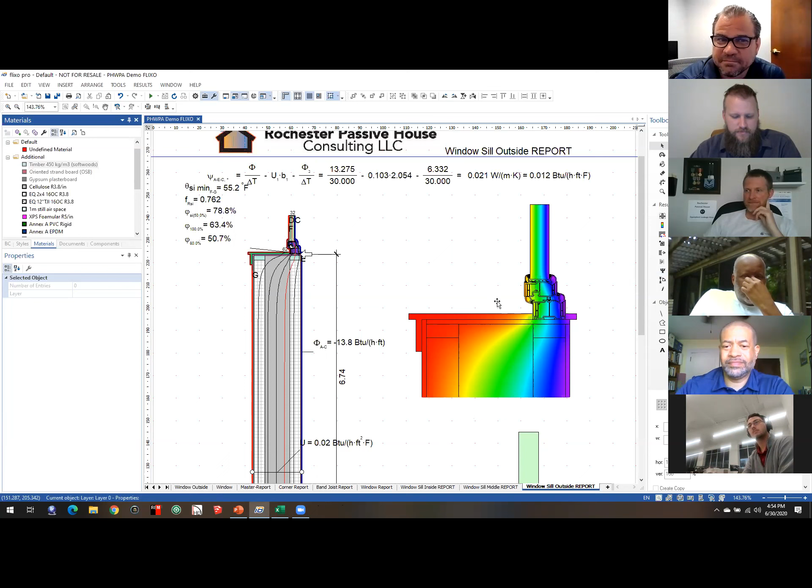Does anyone else have any other questions? We've got a couple more minutes.

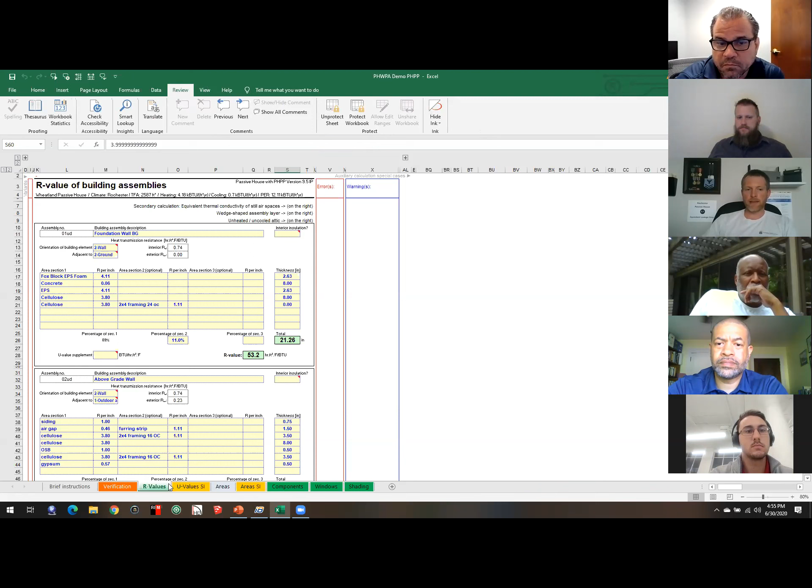Well, if no one's got any other questions, let me touch on this real quick. This is a PHPP with a lot of hidden tabs, so this is all I'm showing right now. I don't know if everybody knows this, and they don't really talk about it in any of the trainings, but the IP version of PHPP is just a skin for the SI version. What you do is unprotect—you go to review and unprotect the workbook, and that allows you to see all of the hidden tabs.

I'm sure you can hear my wife just got home from work.

So all of these tabs are hidden, and every tab has an SI tab associated with it. That can help you transfer information between units. So you have an R-values tab and a U-values tab, and they're linked, and they do the unit conversions for you.

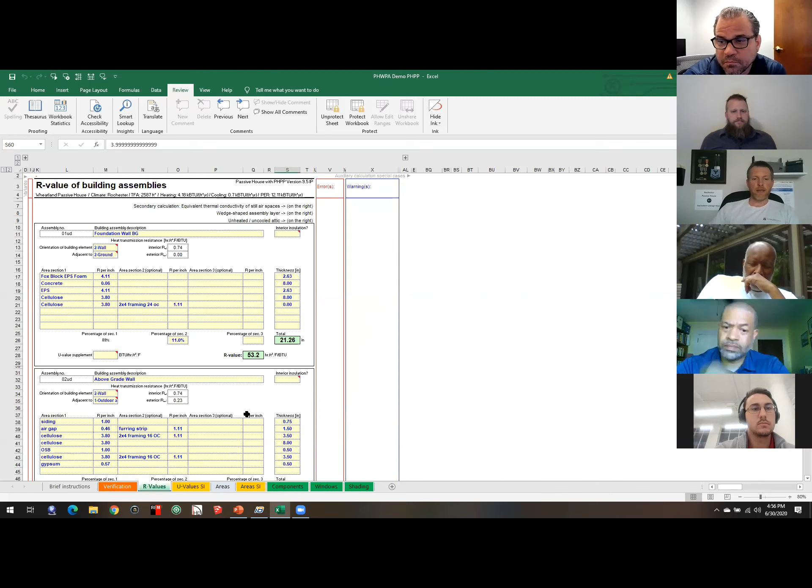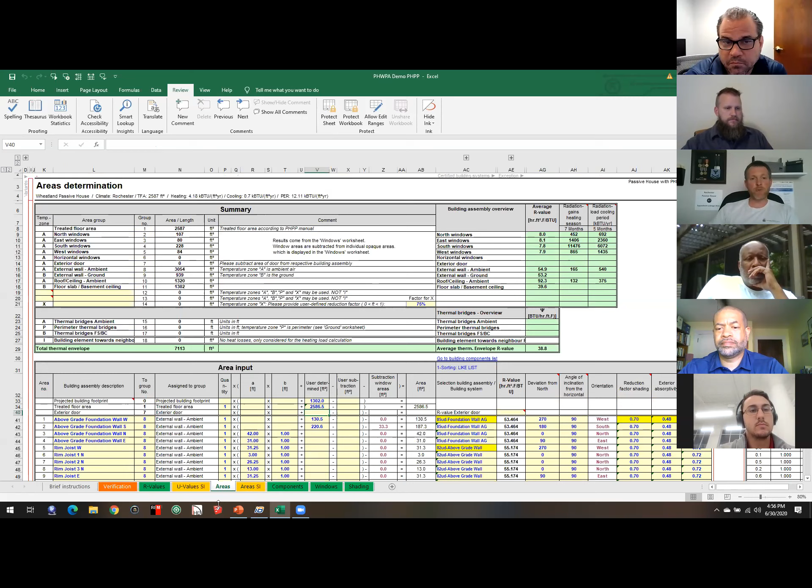And this is the section - I'm in the areas tab of the PHPP. Just scrolling down, scrolling down. There's your thermal bridge inputs right there. So this is where you would input all of that information from your psi values.

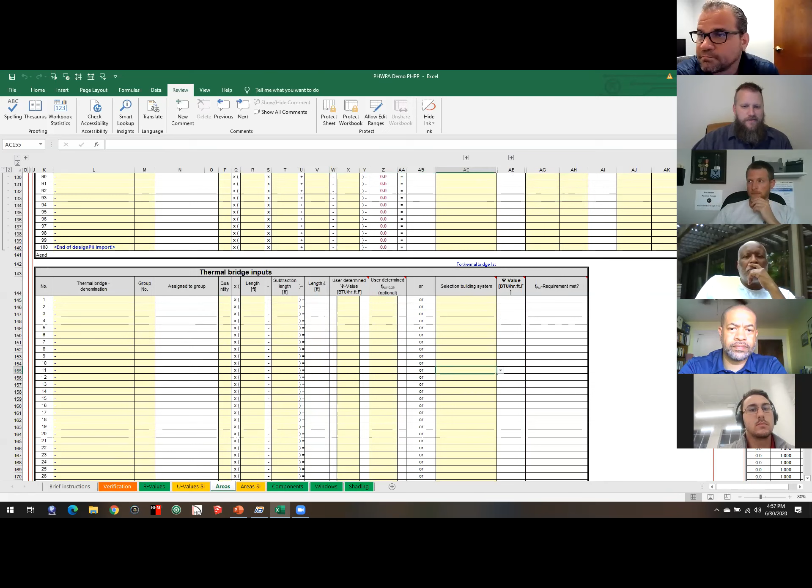But when you have the IP version of PHPP, you actually have both - that will help people in the future. I didn't know that until I became a certifier. It's in the other units, but isn't a lot of it also in German?

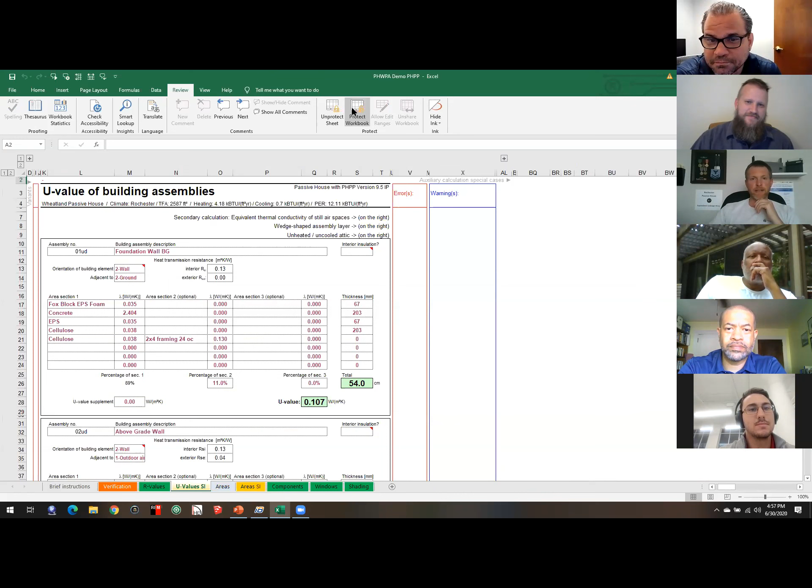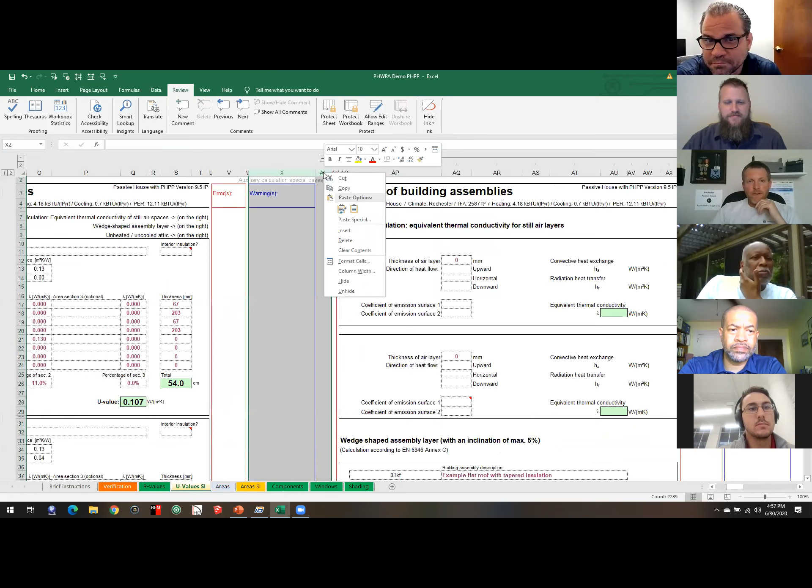So then we can start going to this area here - oh, I've got to unprotect the sheet. If we just keep scrolling over and start unhiding tabs... there it is. So this is now all in German, and this is where all the calculations are actually done, off to the side. That's where your brain explodes. Yeah, you've got to have Google Translate up to figure out what's going on.

That includes the climate sheet, which also has the SI page. I hid the climate sheet - that's fine, because I had to pull in climate data and converted it all. I pulled in climate data from Passipedia, and I wish I'd realized there was an SI version already. I just didn't know, so I could have just dumped the climate sheet in there and not had to convert everything. Yep, we'll be learning those little tricks for the next 10 years.

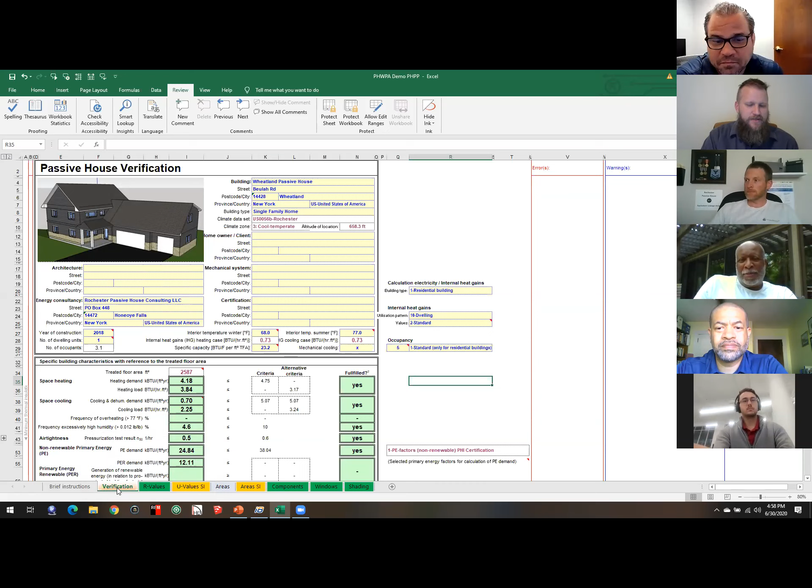Oh yeah, there's also a super useful conversion tab at the very end. I've used that a few times. Very helpful conversion - but when you have a whole table full of climate data to go through, it's something else.

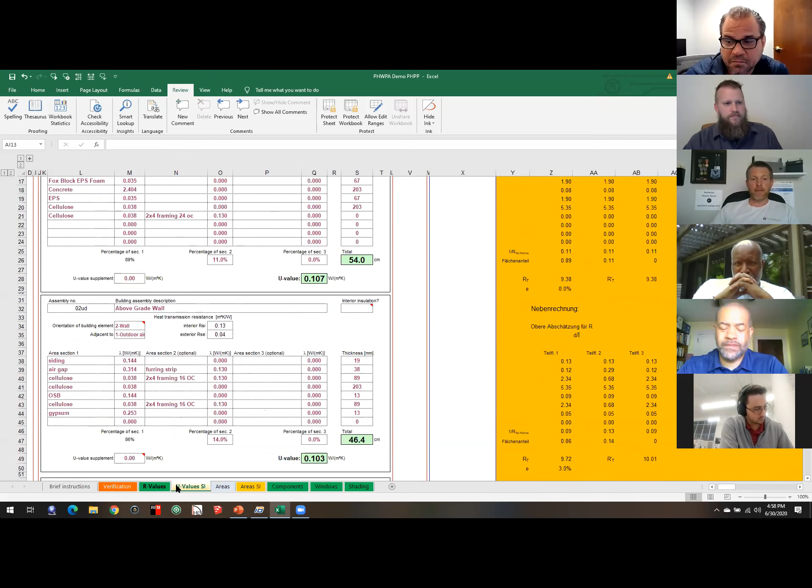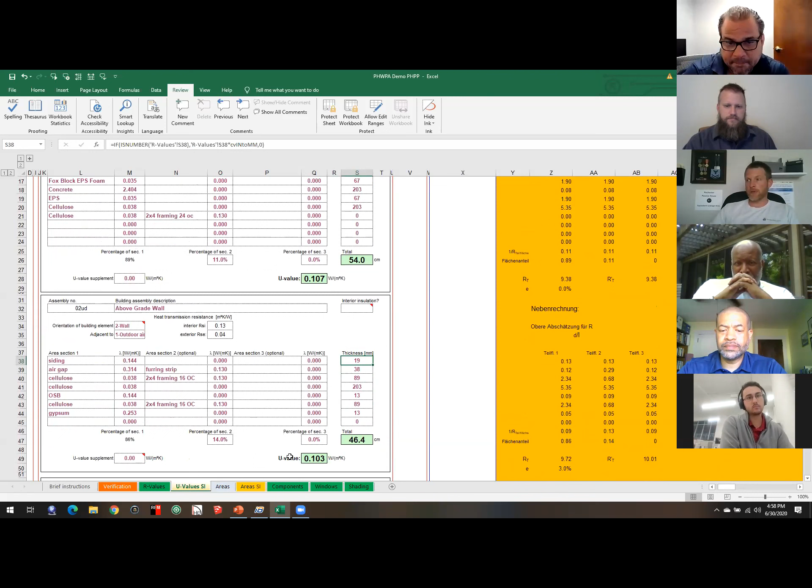So when you're designing in Design PH, everything is SI. So I usually like to start by building my U-values, building my R-values in PHPP, and then opening my U-values tab and just copying this information over - watt per meter Kelvin values and millimeters - right into Design PH. That's the quickest way to get good values in your Design PH model.

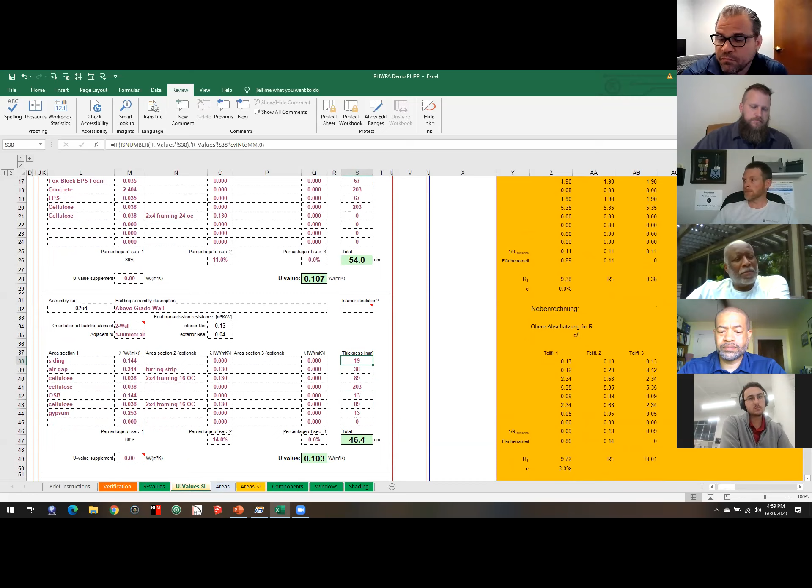Alrighty, well we are right up against it. If there's any other questions, we've got time for one more.